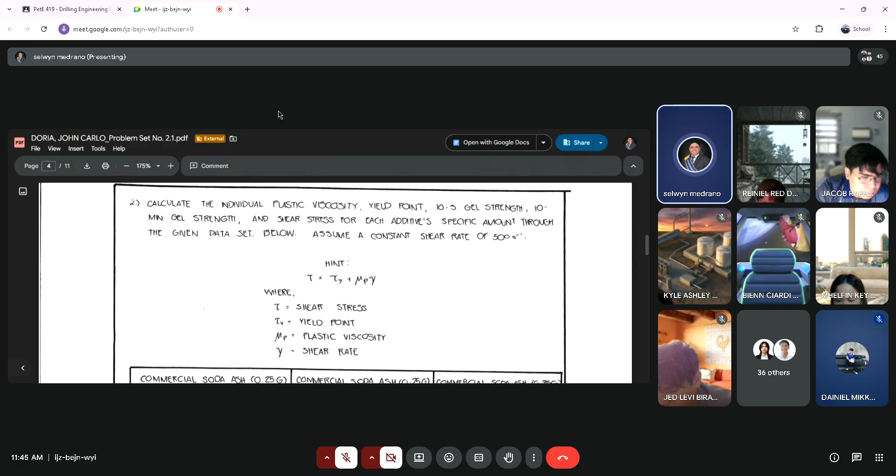So for this one, we have a given formula. Shear stress is denoted by tau, yung tau na symbol. If you could remember during our discussion in bit, we've also used tau. So we have tau sub y for the yield point. We also have mu p for the plastic viscosity. And we also have the gamma symbol for the shear rate. So the shear stress is equal to the yield point plus the plastic viscosity multiplied by the shear rate. Okay, so take note of this.

So we have this given data for commercial soda ash for 0.25, 0.5, and 0.75 grams. As you can see, there are 3 trials for the dial reading. So meron tayong 3 trials. So our goal is to get its average. So for example, for the rotary speed of 600 RPM, we have 3 dial readings, 18, 19, and 17. So we'll get its average in order for us to get the true dial reading.

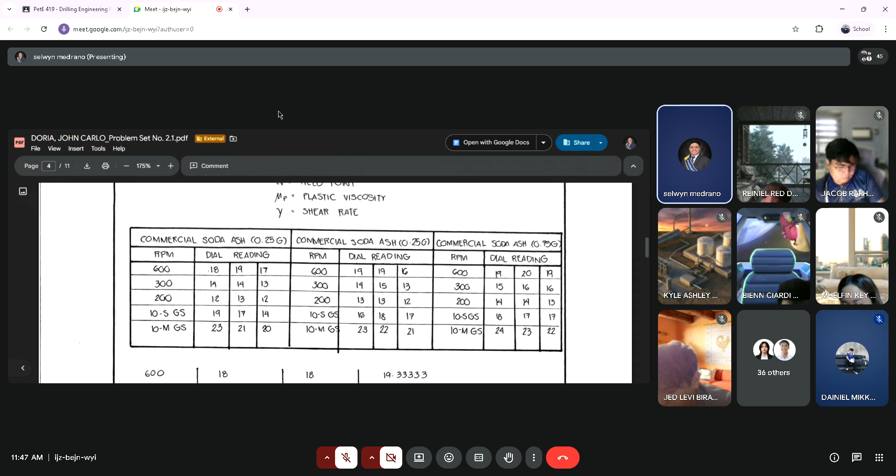So bakit mahalaga itong mga rotary speed na ito? Based on these rotary speeds, specifically 600 RPM and 300 RPM, we will be getting the values of plastic viscosity and yield point. So for our equation here, we have the formula for getting the plastic viscosity. The reading on 600 RPM minus the reading on 300 RPM will give us the plastic viscosity. Okay, gets po yun.

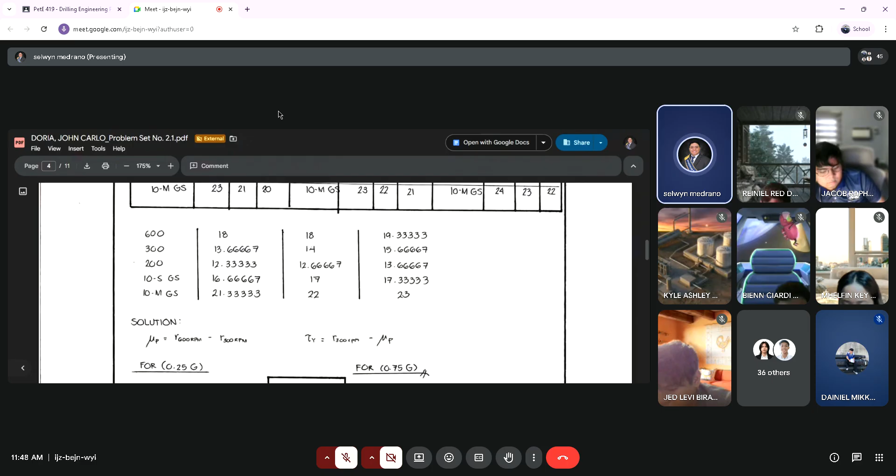Okay. I'll try to download this one para masulatan natin siya, for a while lang. Then I'll be opening it in Adobe. Okay po. For a while lang, while I reshare my screen. Can you inform me if visible na po siya? Visible na po. Okay, thank you.

So, our formula, ulitin ko, for the plastic viscosity, we have the reading in 600 RPM minus reading in 300 RPM. Then for the yield point, we have the reading in 300 RPM minus the plastic viscosity. So, based on the first equation, we can derive another formula for getting the yield point without needing to compute directly the plastic viscosity. So how will we do that? We know that the plastic viscosity is reading in 600 minus reading in 300. So this minus would be distributed. Magiging minus R600 siya, tapos ito ay magiging plus. So technically, our new equation is 2 times reading on 300 minus reading on 600.

Gets nyo kung bakit naging ganito yung bagong formula? Pwede natin siyang isulat as ganito. If halimbawa ang required lang hanapin is the yield point, we'll only be dealing with this formula here. Okay? Clear po tayo doon? Pinalitan ko lang po itong plastic viscosity in terms of the dial readings for 600 RPM and 300 RPM.

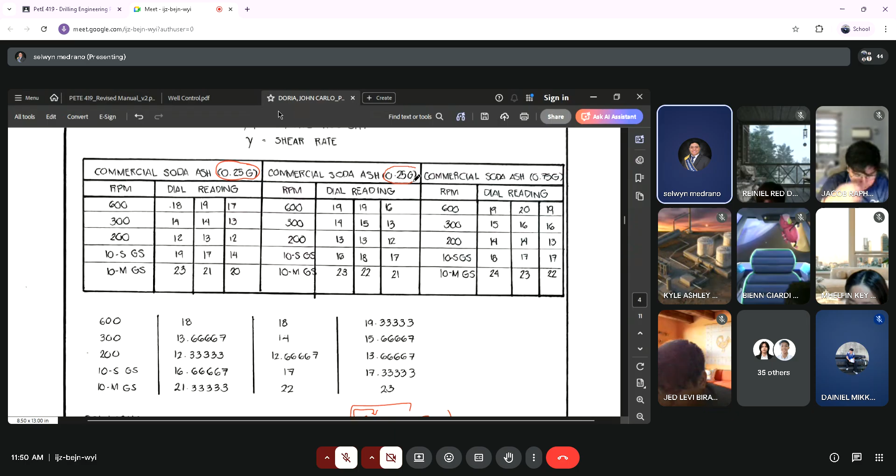So, as you can see here, there is a table that shows the average of each concentration of soda ash per rotary speed. For the rotary speed, it is subdivided into 3. Then we have here the 10-second and the 10-minute gel strength. So, just from its name, 10 seconds and 10 minutes. So technically, after we subject our drilling fluid samples to rotation at maximum speed, or 600 RPM, once we stop the viscometer, maghihintay tayo ng 10 seconds.

After 10 seconds, whatever the reading becomes, that's what we write as part of the data. That's our 10-second gel strength. So at first trial, after the viscometer rests, 10 seconds after, the reading is 19. That's for the gel strength.

We still need to find its average. Same goes for the 10 minutes - 10 minutes after the rotation of the viscometer stops. That's the concept on how we get this data or value.

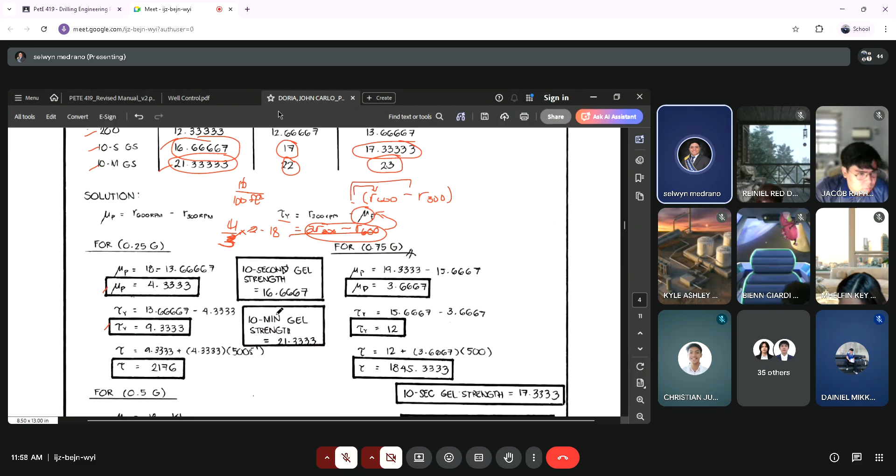So the answer we get is 2,176 and its unit is the same, pound per feet square or pound per 100 feet square.

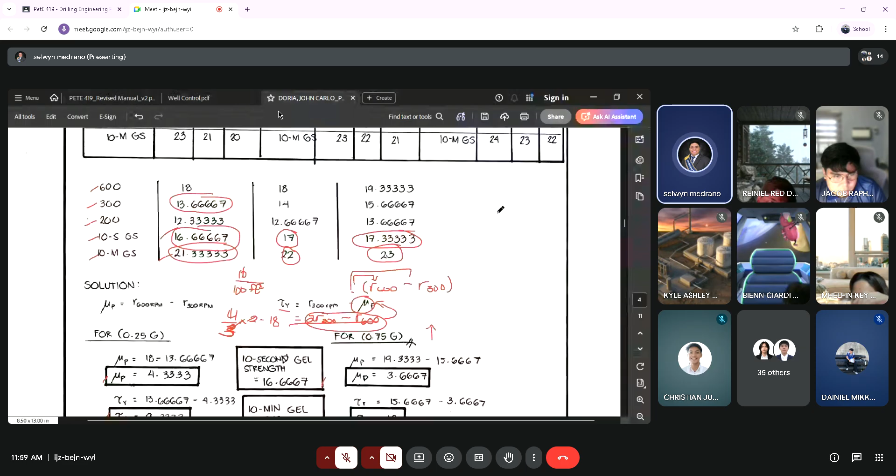As you can notice, the answers are almost the same. If you examine the values, there is a slight variation. As the concentration of soda ash increases, what do you notice? The plastic viscosity decreases as the concentration of soda ash - sodium carbonate - increases. And in terms of the yield point, it increases - there's an increasing trend. In terms of our shear stress, it's also a descending trend, decreasing as we increase the concentration of soda ash. So this is the effect of putting soda ash into our drilling fluids.

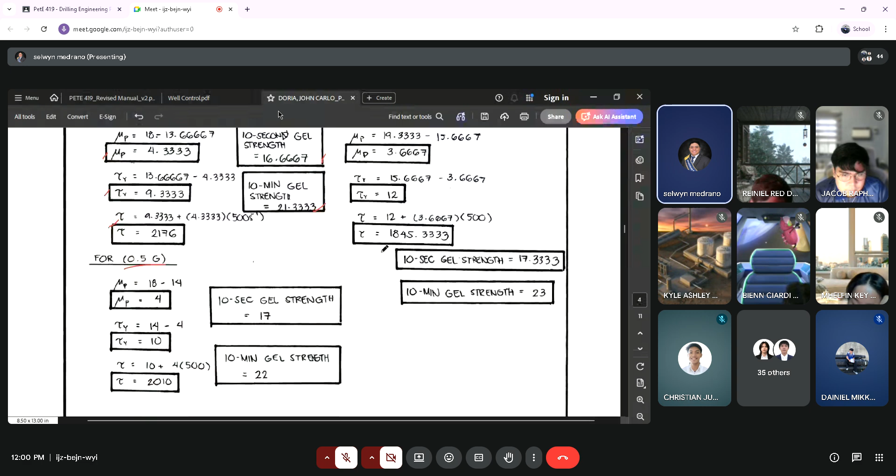Question? How about the gel strength? For the gel strength, as you can notice, there's a slight change - an increasing trend. So as we increase the concentration, the gel strength also increases, as you can notice in the data.

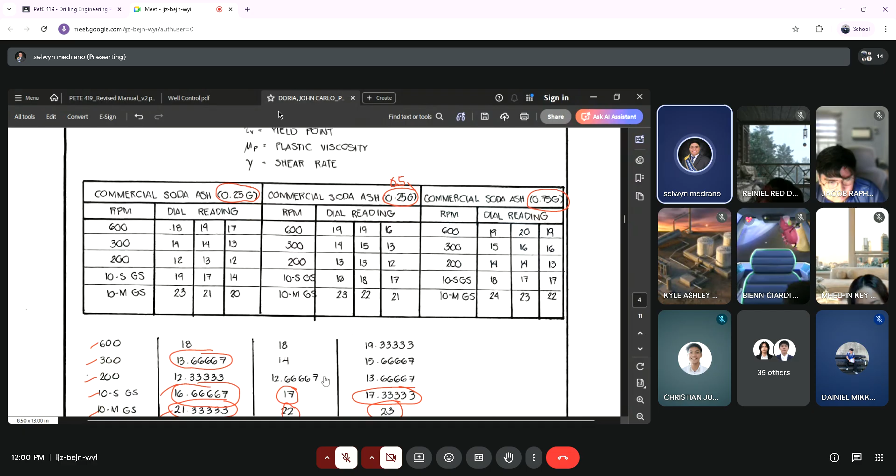Okay, thank you. So let me just reshare my screen for our next one. Same lang pa. Dito pala siya. Sabay na po siya on your end. Okay, close natin, close na natin to.

So for now we'll be dealing with well control. This is nasa lecture notes naman natin siya, but it is somehow in the middle, since the earlier part is more of calculation. Later on we'll be dealing with the calculation if time permits and if we still have time.

Okay, so for well control, we know that our borehole or our formation, the pressure is everywhere. The presence of pressure is inevitable. It's literally just there. So without it, we are outside space and time. So basically that's pertaining to pressure in general. Kung walang pressure, we cannot breathe because it will require pressure, the atmospheric pressure, for us to be able to breathe. So basically it's like the vessel or bloodline of our field.

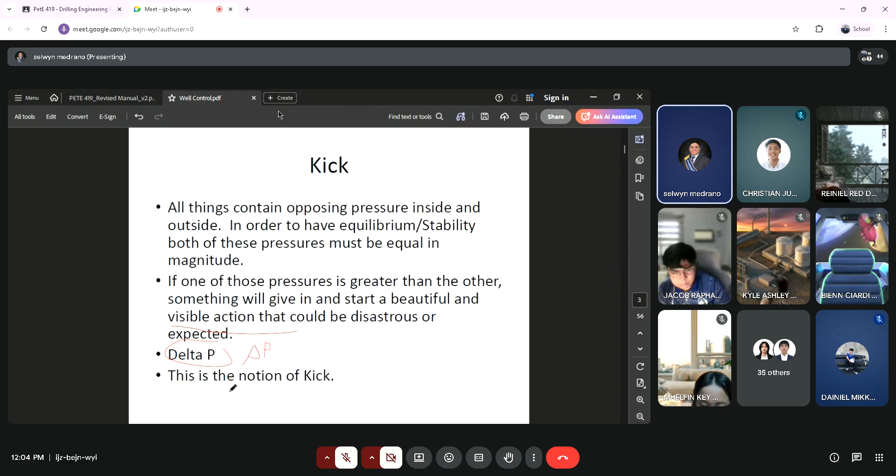So all things contain opposing pressure inside and outside. In order for us to have equilibrium and stability, both of these pressures must be equal in magnitude. That means if one is higher than normal, it is usually the formation pressure. If it's higher compared to the pressure exerted by our mud or the hydrostatic pressure, then technically there could be a movement, a kick. So that could be disastrous if it is not controlled. So kick is denoted as delta P because there is a difference in pressure, and this would be the notion of kick, the delta P.

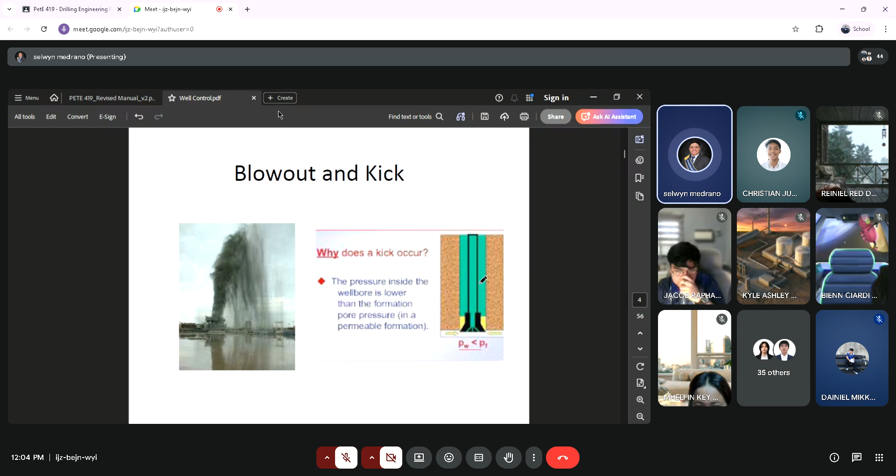Okay, so why does a kick occur? The pressure inside the wellbore is lower than the formation pore pressure. So this is just the mathematical equation or mathematical inequality that represents a kick - when the borehole pressure or the wellbore pressure is less than the formation pressure.

So well control and blowout prevention - without well control and blowout prevention, there would be higher drilling costs. This is just very obvious, no? Sobrang obvious ng part na yan. There would be higher drilling costs when there occurs a problem.

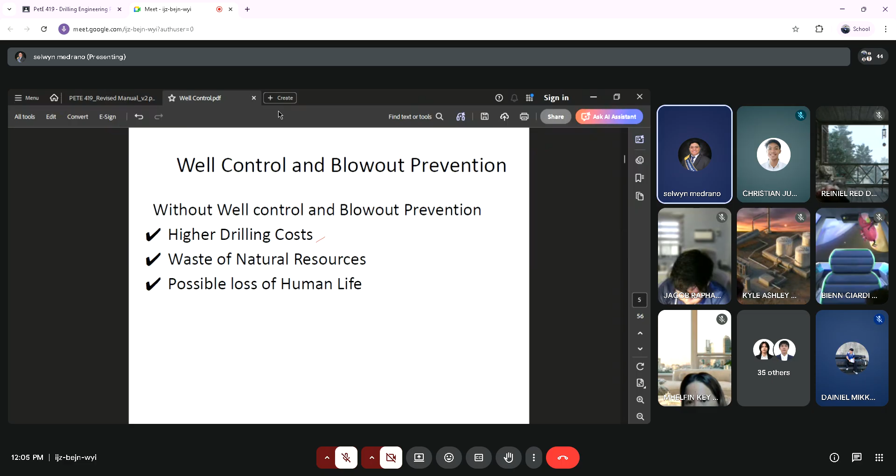So if a problem occurs, syempre magkakaroon ng several consequences with regards to devastation, that is connected with the second one - there would be waste in natural resources. And also it could result in a possible loss of human life.

So well control means the method used to minimize the potential of the well to flow or kick, and to maintain control of the well in the event of flow or kick. This well control is not only applied during the drilling operation - it is also applied during well completion, well workover, and even in abandonment, as well as in well servicing operations. So we have different measures, practices, procedures, and even equipment for us to ensure well control.

Such are fluid flow monitoring - we have real-time monitoring with regards to the fluid flow, with parameters related to such. We have pressure, the flow rate in terms of mass, in terms of volume. We also ensure safe and environmentally protective drilling. Siyempre, we have protocols that we are following. We also have proper procedure or proper execution of completion, of well completions, as well as abandonment and well workover.

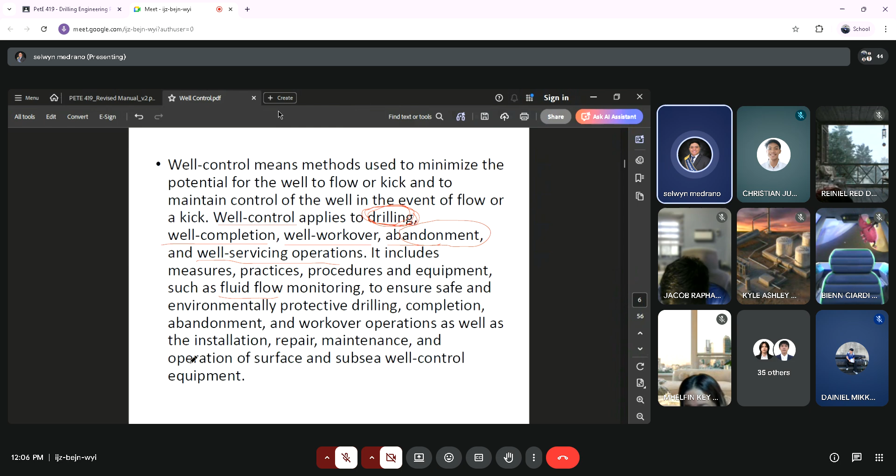So for well workover, that's where installation, repair, maintenance, and even the operation of surface and subsea well control equipment comes in.

Okay, so a formation fluid influx may result from one of the following reasons. We have here 6 listed reasons. First, we have abnormally high formation pressure.

So this is very obvious, no? Kapag mas mataas talaga yung formation pressure, syempre, in order for us to prevent kick, we need a higher density of drilling fluid or heavier drilling fluid or drilling mud.

Then also, one of the reasons is lost circulation. Kaya we need also to have the hydrostatic pressure exerted by our mud to be slightly higher. Kasi kapag sobrang taas, magkakaroon siya ng lost circulation. And this lost circulation, as time passes by, ang tendency, bumababa na yung ine-exert na pressure or hydrostatic pressure doon sa ating borehole, meaning it will again initiate a kick or the influx of these formation fluids.

Then also we have mud weight is very low or too low. Technically, by the formula of hydrostatic pressure, it's density times gravity times the height, or since this is talking about the borehole, this height is pertaining to the depth. So in order for us to get the high value of that pressure, we need to raise the density, kasi ito naman gravity, it's constant.

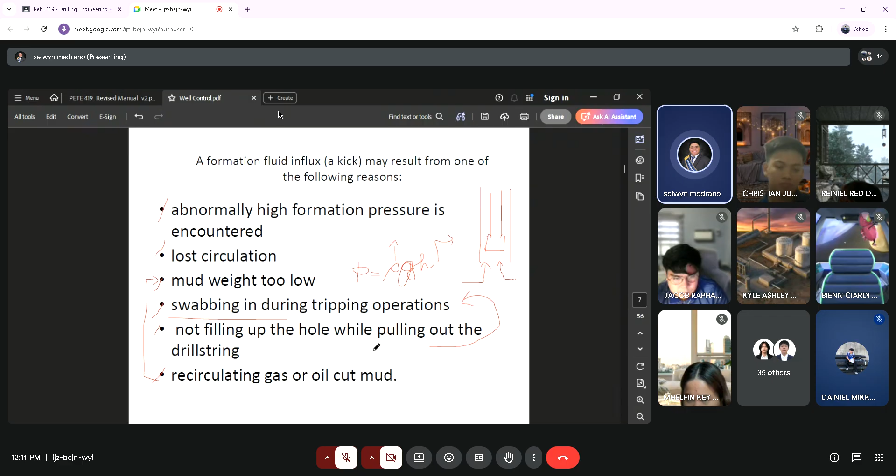So along with well control, we have this primary and secondary control. For the primary control, syempre yun yung pertaining to the drilling fluid's hydrostatic pressure. So that's the primary control. Secondary control naman is our BOP or the blowout preventer. They're familiar naman with BOP, kahit second year pa lang naririnig na ang BOP.

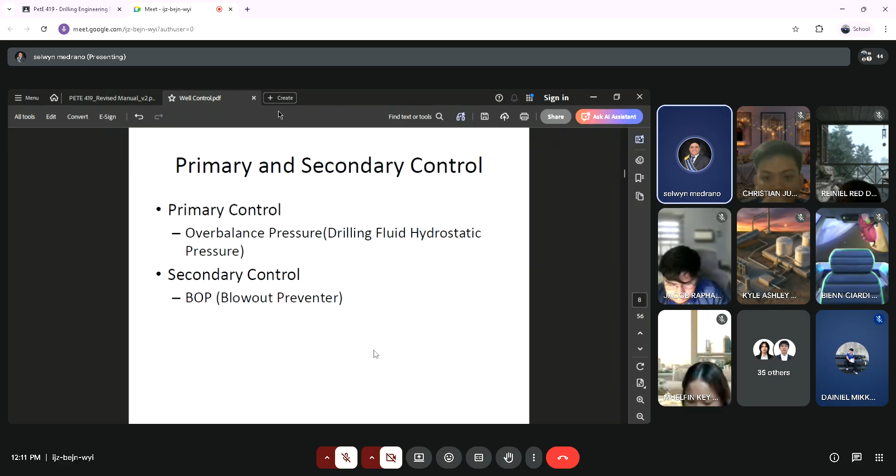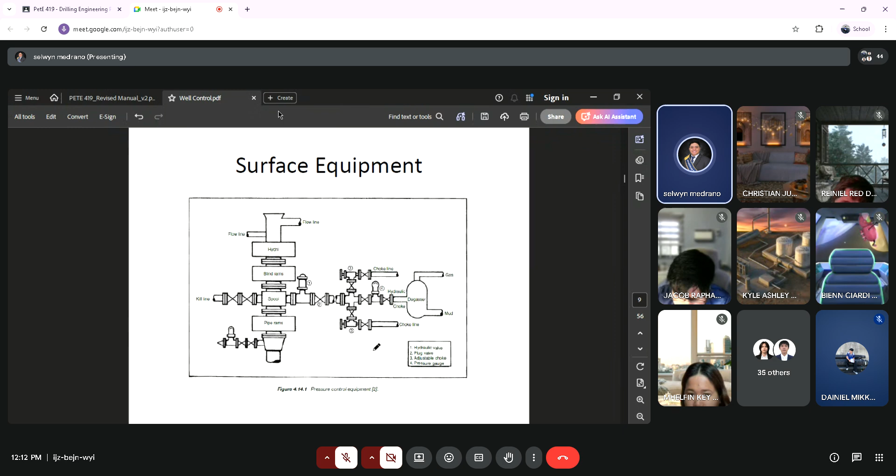Okay, so we have warning signs of a kick. Ano ba yung mga warning signs ng kick natin? First, we have drilling break. Ano pag sabing drilling break? Familiar ka sa drilling break? Di ba parang na-discuss na natin yan? Drilling break is the sudden increase in the drilling rate.

Tama? Are you familiar with drilling break, guys? Nagkaroon ng sobrang increase, or anong term yun? High increase, high difference in that small span of time, nagkaroon ng high increase doon sa drilling rate. So yun yung tinatawag na drilling break.

Next, nagkaroon ng decrease in pump pressure. Kapag nagkaroon ng decrease in pump pressure, meaning the fluids are already intruding doon sa ating borehole, kasi nababawasan yung pressure na in-exert ng pump, yung mga natutulak niya. Then we also have increase in pit level.

So this is a very common or very obvious sign or warning sign of a kick. Nagkakaroon ng increase doon sa pit level. Siyempre, doon tumataas yung level ng ating drilling mud. For example, yung level ng drilling mud natin ay halimbawa hanggang ito yung ating borehole. Bawa nandito pa yung drilling mud. Halimbawa nandito lang yung level ng drilling mud. Tapos napansin mo nagkaroon na increase. So tendency may kick, may possibility ng kick.

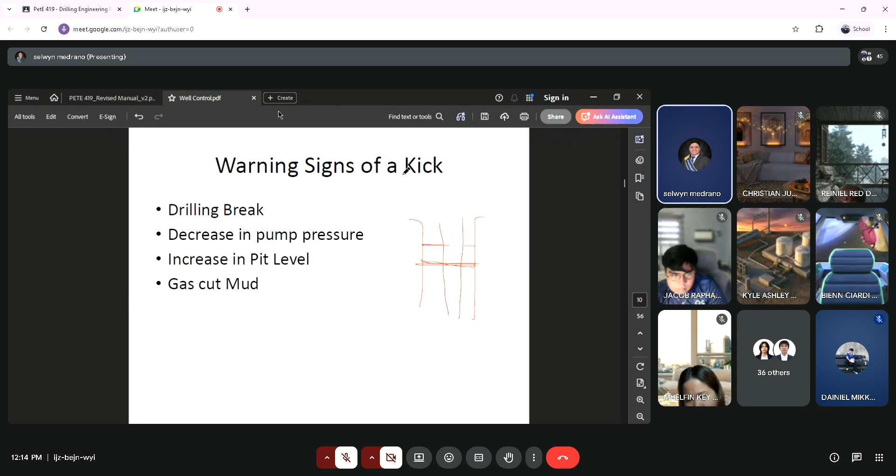Okay. By definition, may definition pala yan. Discuss ko isa-isa. So, yeah. Ang sudden increase of drilling break can be caused by, first, there is a soft formation, and it's also caused by permeable zones.

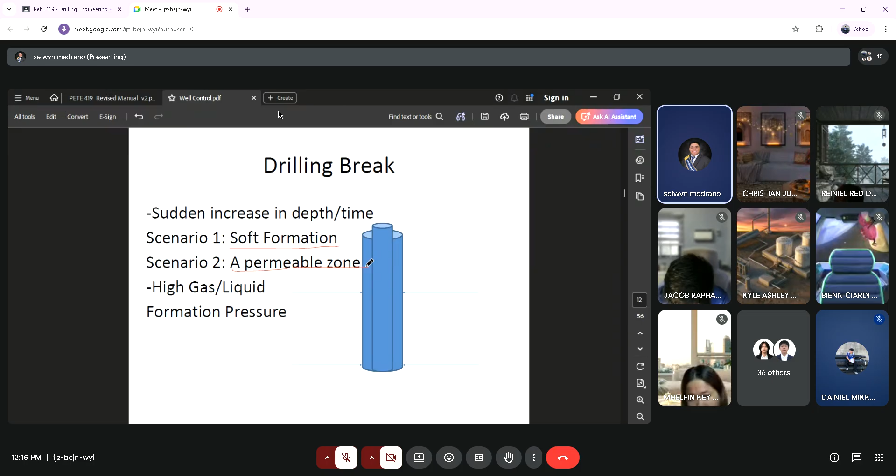So, decrease in pump pressure: when less dense formation fluid enters the borehole, yung hydrostatic head sa annulus ay nababawasan, which causes the pump pressure to also decrease. So, although reduction in pump pressure may be caused by several other factors, yung ating kinoconsider ay yung formation fluid influx. Yun yung main natin kinoconsider kasi preventive measure siya. Kasi yun yung kadalasang possible cause.

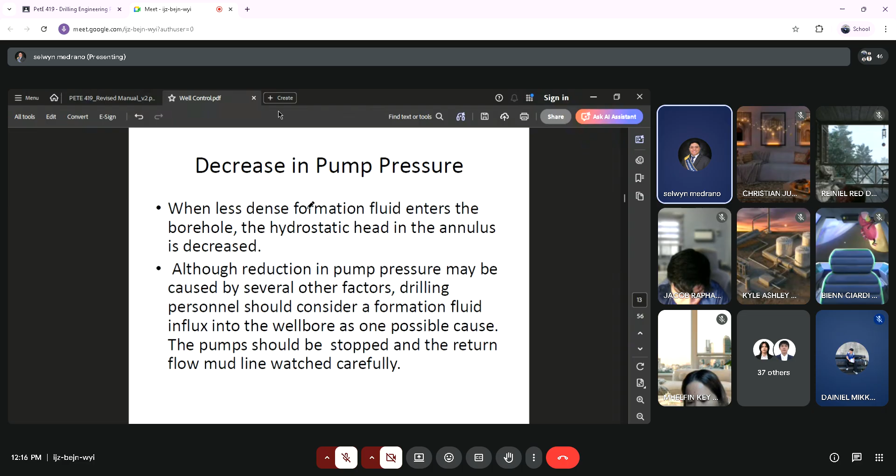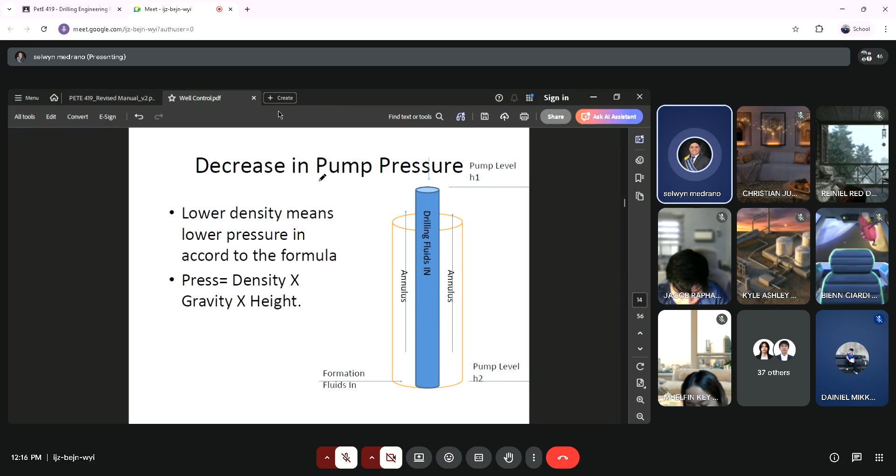And in order for us to remediate that situation, we must stop the pump and return the flow mud line. And you need to monitor it. So yan, ito yung isa pang regards to the pressure, ito yung pinakita ko sa inyo kanina. Lower density meaning low pressure in terms of the hydrostatic pressure. This is very common.

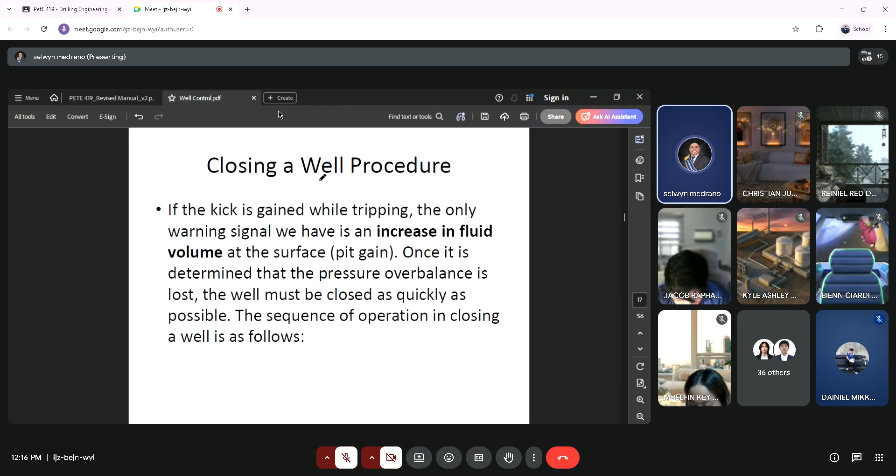So for closing a well we have this procedure. So if the kick is gained while tripping, the only warning signal we have is the increase in fluid volume. We cannot see the other warning signs. Yun lang yung nakikita natin kapag tayo nagti-trip. So para maiwasan, magpo-proceed tayo with kill procedure. So what do we mean by kill? We kill the well. Literal na i-shut off natin yung well. Titigil natin yung well.

So these are the steps on killing the well. So I won't be reading it. Yun naman po ay ibibigay ko sa inyo. So as you can see here, yung pinaka bizarre na step is itong number 8. We notify the company personnel. So basically this is not physical work but more of a communication part.

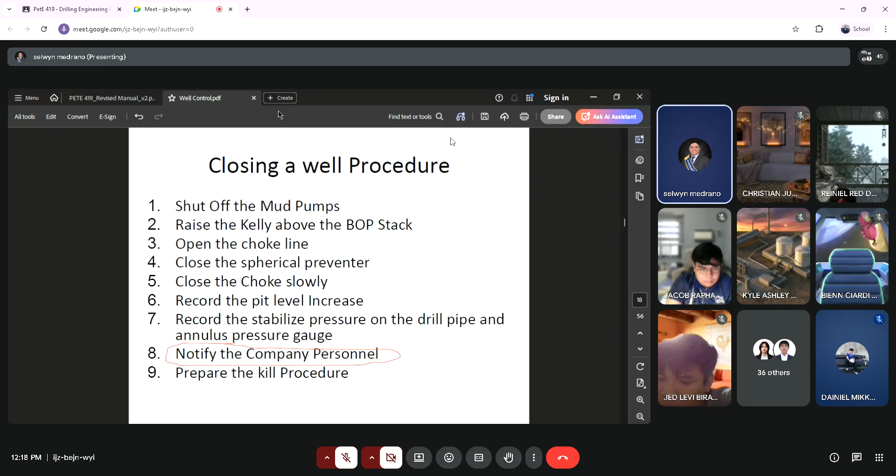Kailangan nating ma-communicate siya sa personnel ng company before mag-proceed sa kill procedure kasi if we kill the well, syempre tumitigil din yung operation which will cost us time. Kaya kailangan nating i-notify muna yung company personnel before we proceed to killing the well. Okay? Clear po yun? So if the well kicks while tripping, these are the steps that are necessary for us to conduct, so nine yan.

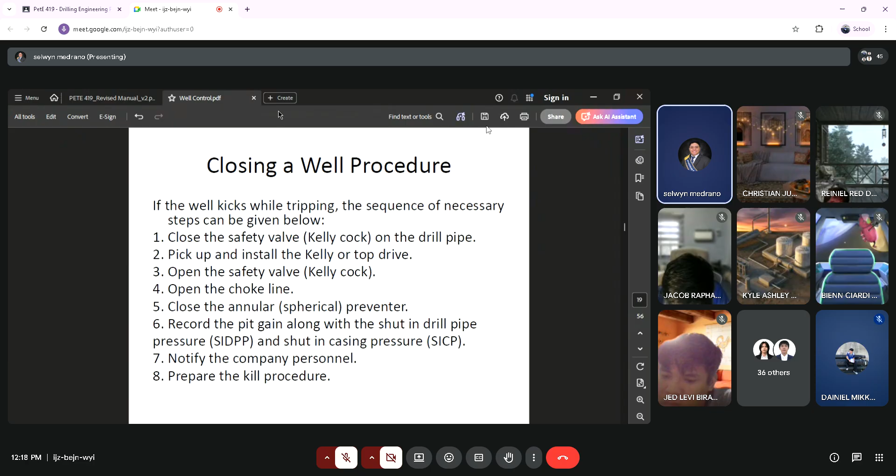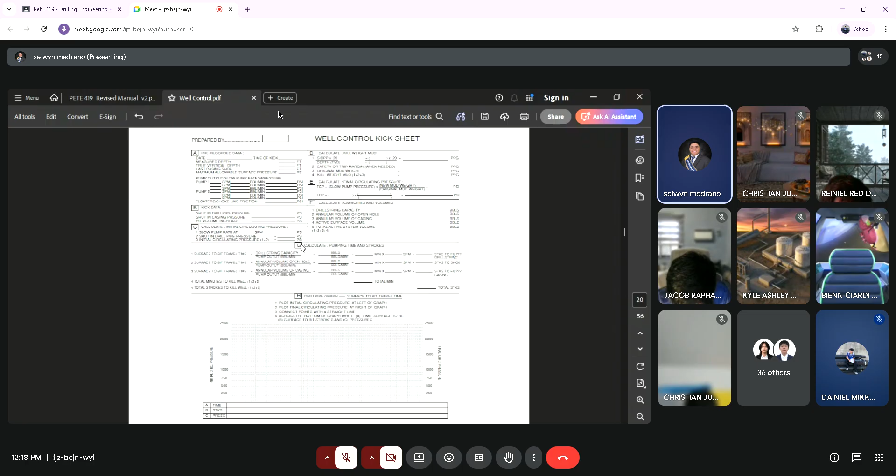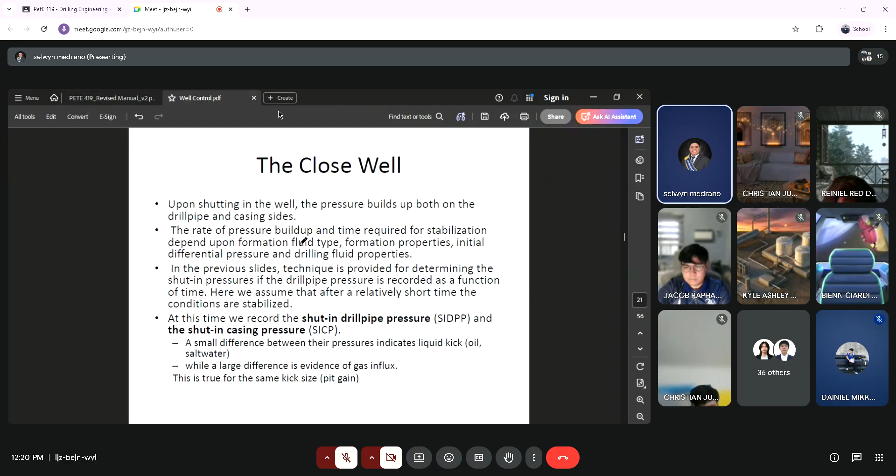So at this time, we record the SIDPP or the shut-in drill pipe pressure and the SICP or the shut-in casing pressure. If there is a small difference between their pressures, it indicates na meron daw pong liquid kick: oil, salt water, or even water. Pero kapag mayroong large difference between the two, ang kick daw po is most probably gas in nature. Okay, inulit lang din yan.

Okay, so for kill control procedure, we have three methods. We have the driller's method, the engineer's method, and the volumetric method. Driller's method is also called the two circulation method. Then engineer's method is one circulation. So yung main difference between the two, the driller's method is more the conventional or traditional way. Itong engineer's method will require computational analysis when it comes to how we circulate, so isang circulation lang yung kailangan, unlike doon sa driller's method, dalawang circulation yung kailangan.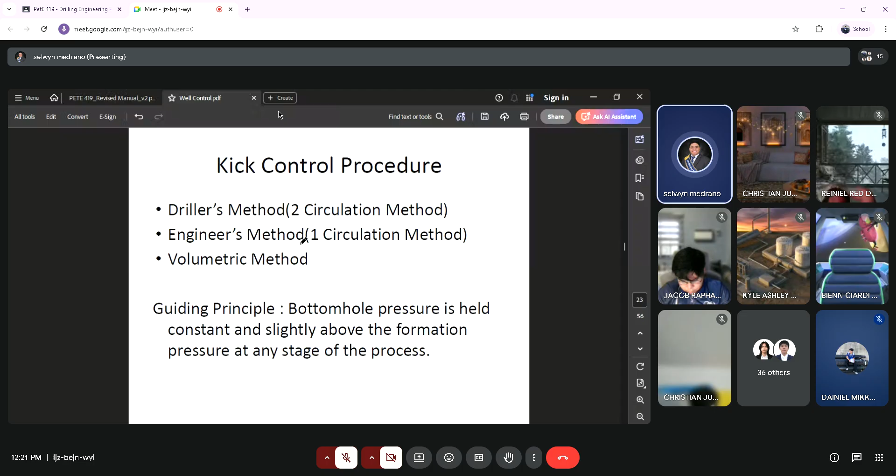So yung guiding principle for a kick control procedure is that yung ating bottom hole pressure is kailangan constant siya, and at the same time dapat siya is slightly above the formation pressure at any stage of the process. And in order for us to choose the most suitable technique, we need to consider these circumstances. So first, we need to consider the complexity of the method and also yung experience ng drilling crew.

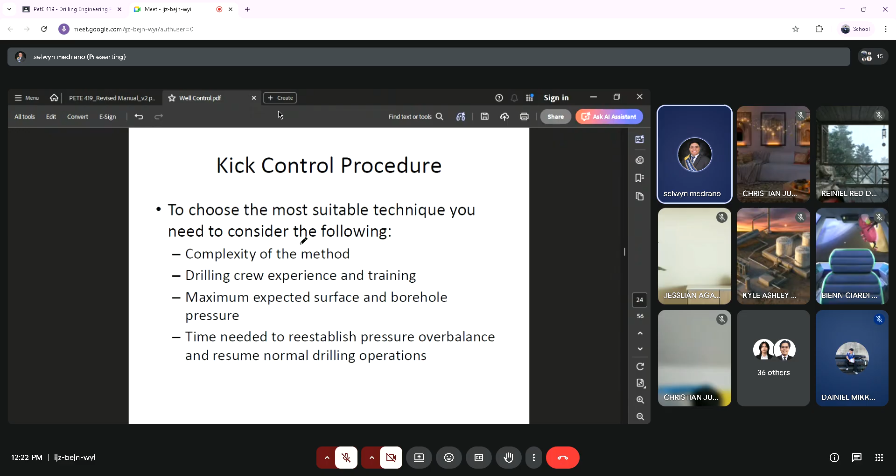For example, nagkaroon ng kick, yung mga drilling crew is more experienced or mas sanay sila sa driller's method. Technically, driller's method would be better, parang yun na yung practical na gawin for that particular situation. So also we need to consider the maximum expected surface and borehole pressure and also the time needed to reestablish the pressure overbalance.

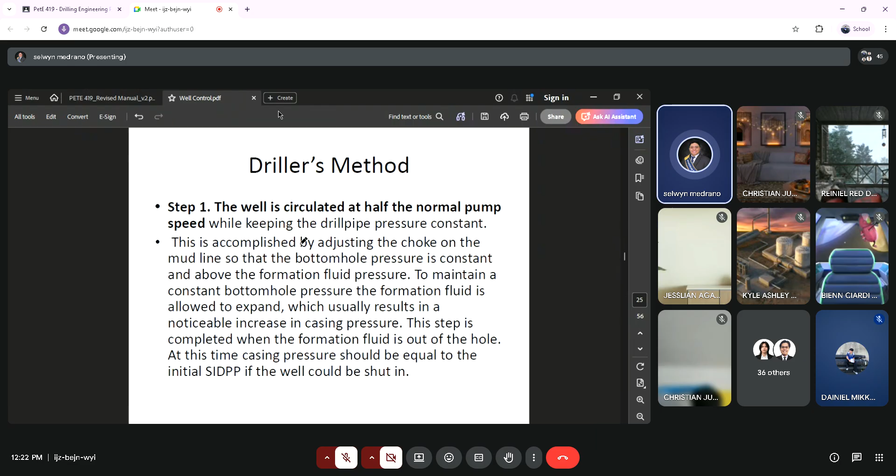So these are the steps for driller's method. I won't be putting into details na dito, but I have already differentiated the driller's and the engineer's method. So here, based on this graph, on the first step, as you can see, there is a constant SIDPP or the shut-in drill pipe pressure. Then by time C, before tayo mag-end doon sa step 2, dapat siya ay gradually nababawasan na yung SIDPP or the shut-in drill pipe pressure.

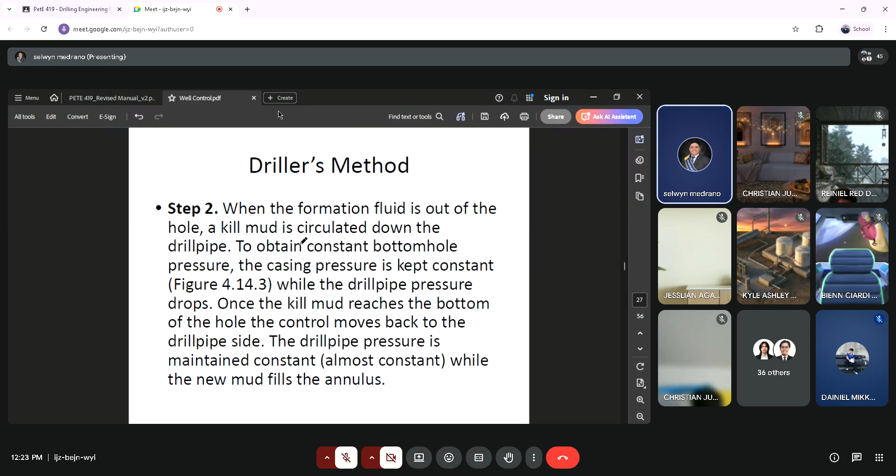So in terms naman of the shut-in casing pressure, we have this time denoted as t sub A, wherein yung shut-in casing pressure natin is at maximum. However, after that time, we need to decrease it to a point, specifically denoted by t sub B, wherein at a specific span of time, dapat siya ay constant. So this is basically after the step 1.

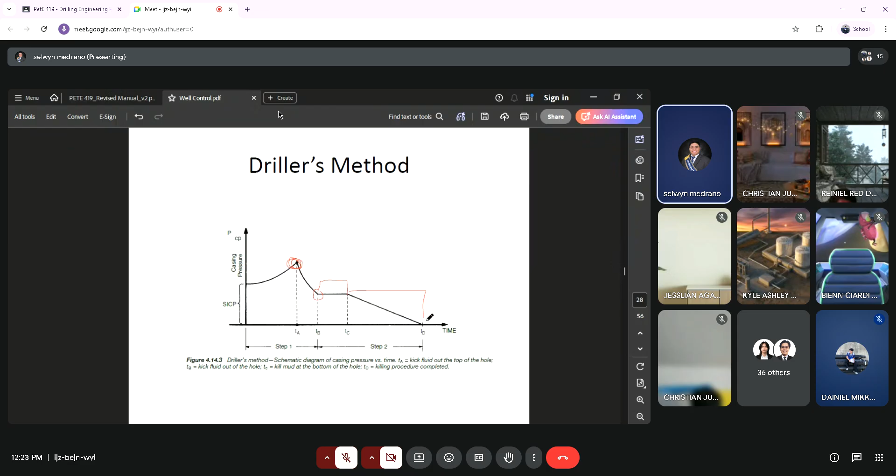Dapat ay constant yung ating shut-in casing pressure, and gradually, bago matapos yung operation or yung procedure, bumababa siya gradually. Hindi biglaan, but gradual. So, yan yung difference for the case of the shut-in drill pipe pressure and the shut-in casing pressure.

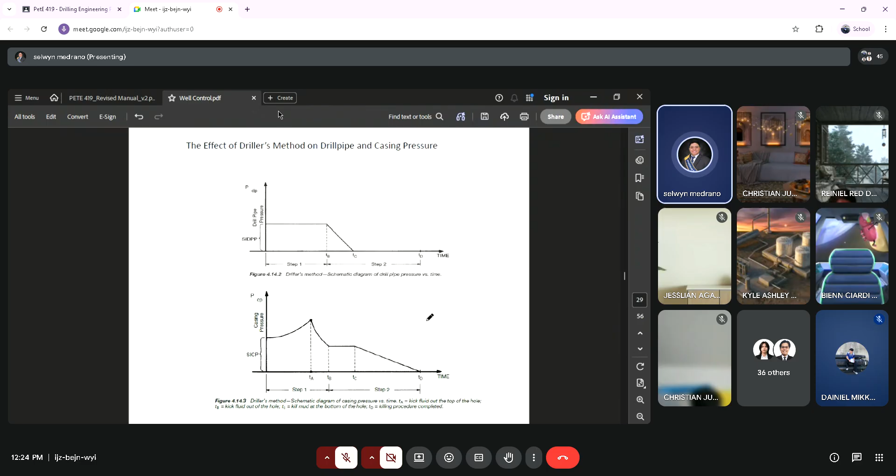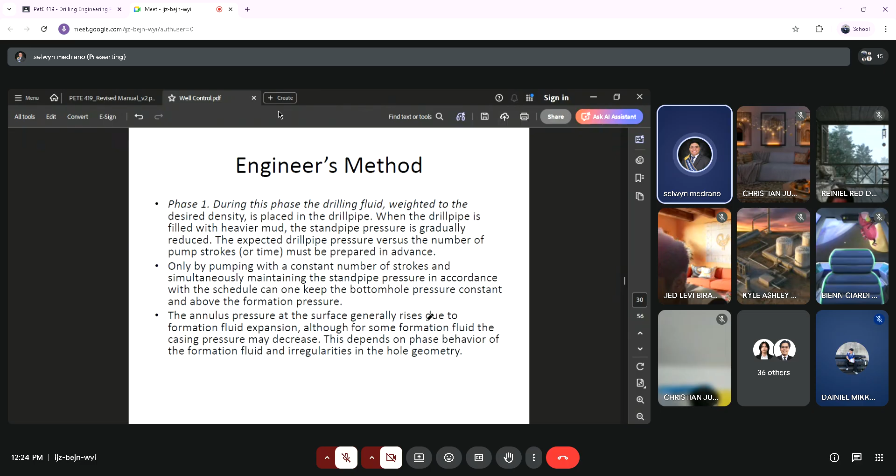In terms of the casing pressure, at the beginning of phase 3, dapat at maximum na yung casing pressure. Then, during phase 3, dapat drastic yung pag-decrease nung casing pressure up until bumaba na siya. So, yun yung nagiging situation in terms of the shut-in casing pressure and the shut-in drill pipe pressure during engineer's method.

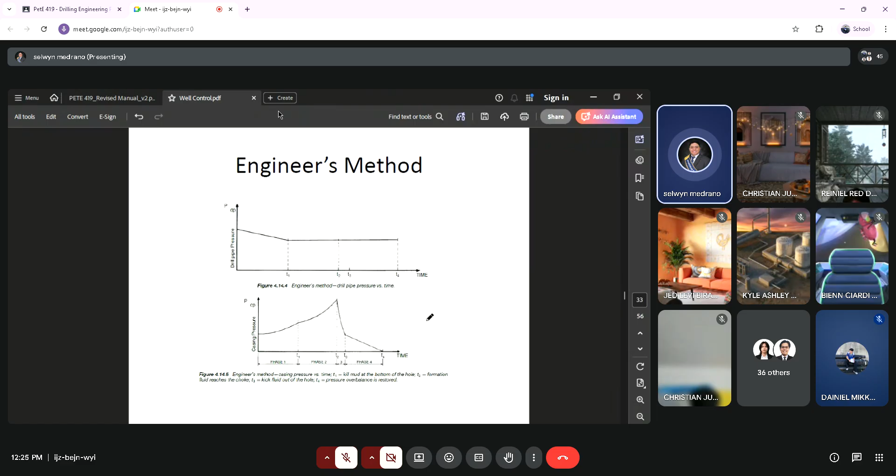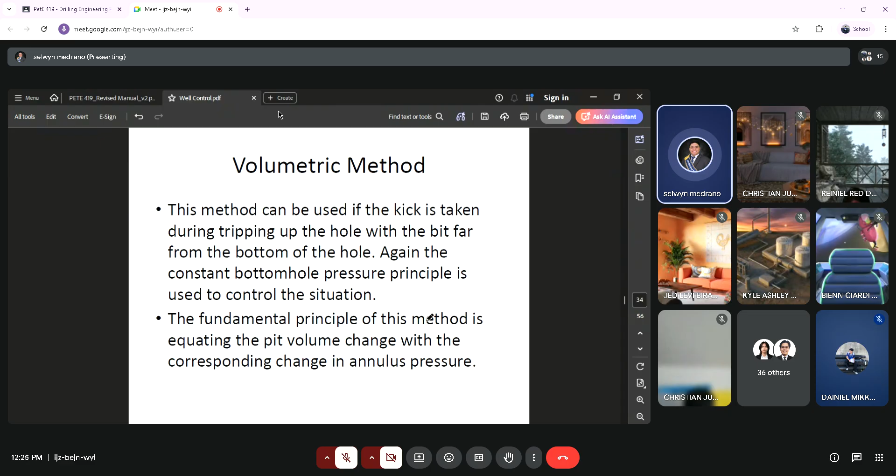Next, we also have the volumetric method. So this volumetric method can be used if yung ating kick is taken during tripping up the hole with a bit far from the bottom of the hole. So the fundamental principle behind this is you equate the pit volume change with the corresponding change in the annulus pressure. So this is the mathematical formula.

We have the change in surface pressure at casing side in PSI that is equal to the change in pit volume all over the volume capacity of the annulus, yung annular volume capacity, multiplied to the constant 0.052 times the specific weight of the mud.

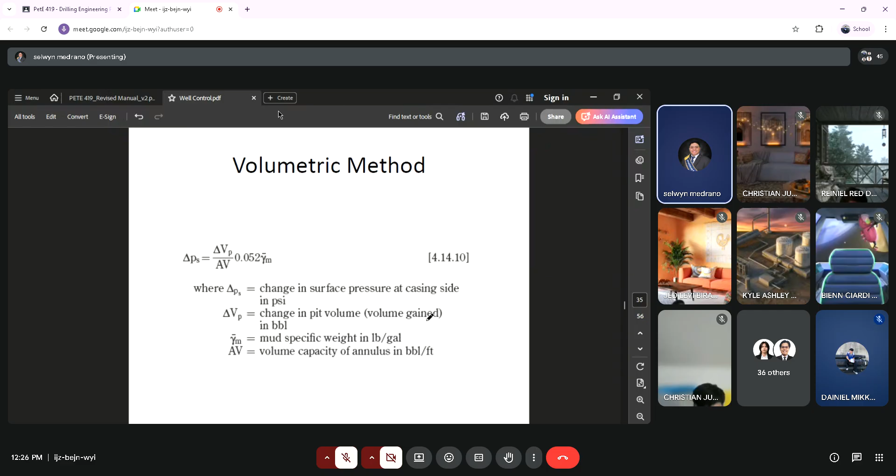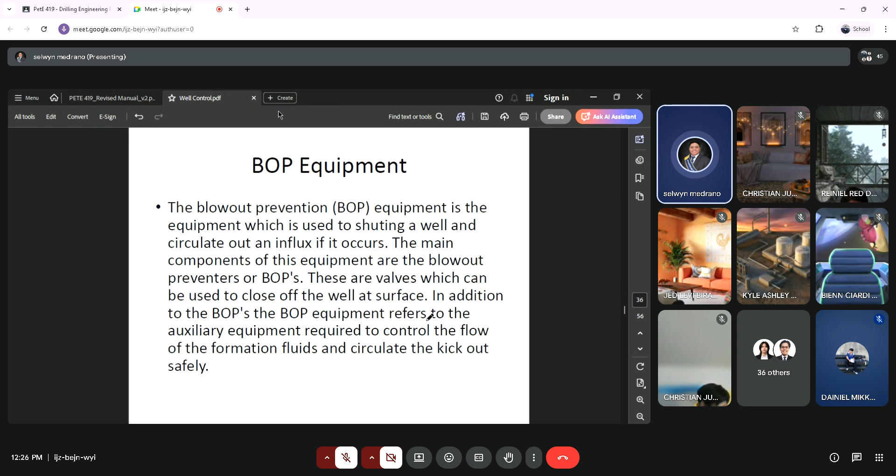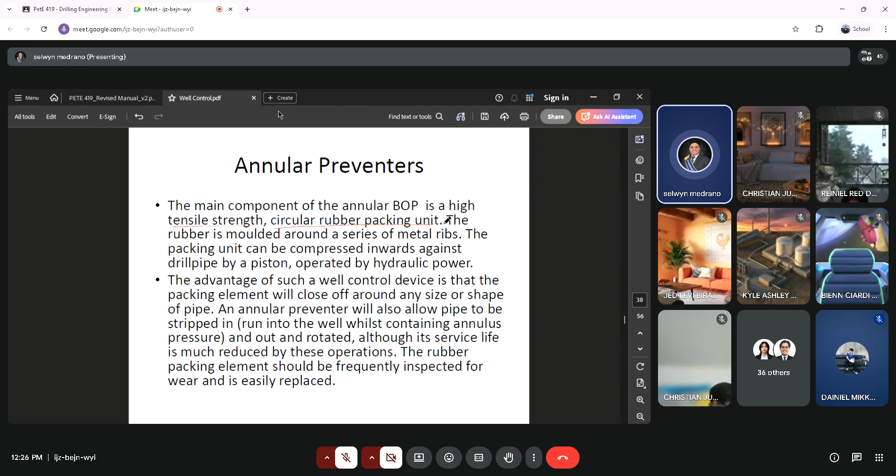Then we have the ram preventer. For the ram preventer, derived yung name niya from the twin ram elements. There are actually three types of ram available. We have the blind ram. Blind ram, ganun siya, literal na ganun. Tapos pipe ram, and also the shear ram. So blind ram will completely close off the wellbore when there is no pipe doon sa ating hole. Tapos yung pipe ram naman seals around a specific size of pipe. So meron siyang sizes na sinusunod.

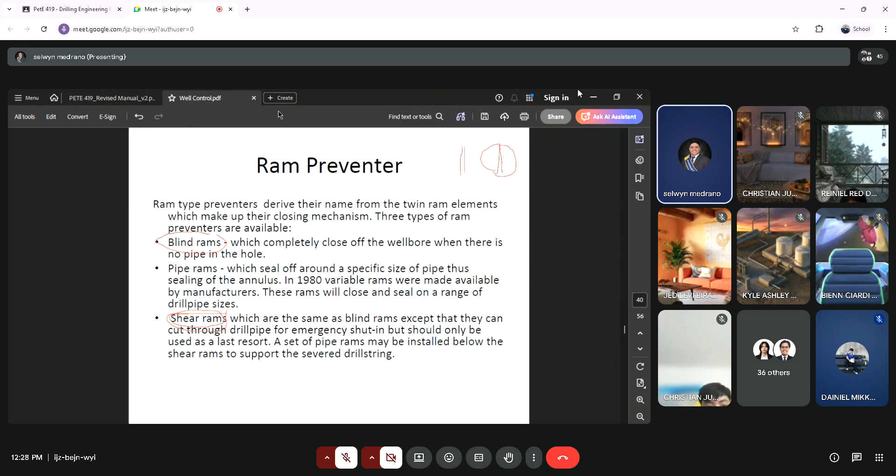We have a drilling spool, no? So drilling spool is a connector which allows choke and kill lines to be attached to the BOP stack. So these choke and kill lines, sila yung mga high pressure pipelines that are connected directly to the BOP papunta sa facility or sa production facility. And these are very vital kasi it reduces the pressure doon sa mismong BOP, no? Nakakatulong siya to bleed off. Nagkakaroon ng bleed off. Yung term bleed off.

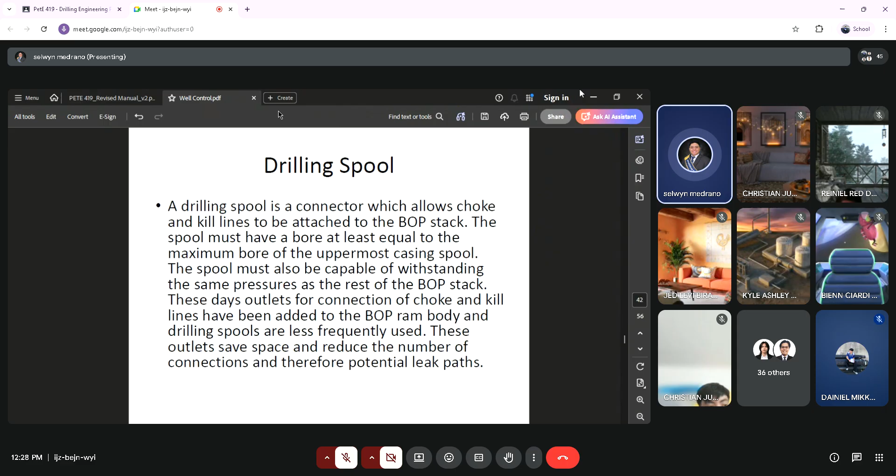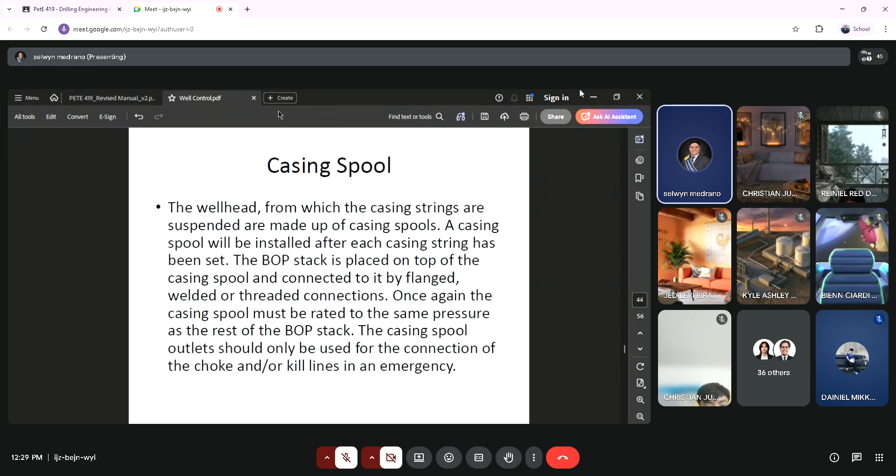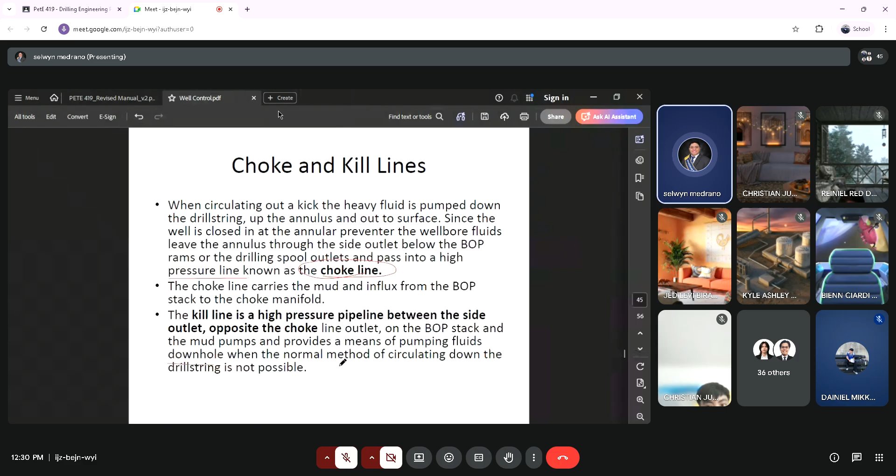We have a choke line and a kill line. So high pressure pipelines sila, and yung placing nila is very important, no? Kung saan siya naka-place. So since the well is closed in at the annular preventer, the wellbore fluids leave the annulus through the side outlet below the BOP. Then dumadaan siya sa high pressure line known as the choke line. Ito yung choke line. Then yung kill line is opposite to the choke line on the BOP stack and the mud pumps, and provides a means of pumping fluid downhole when the normal method of circulating down the drill string is not possible.

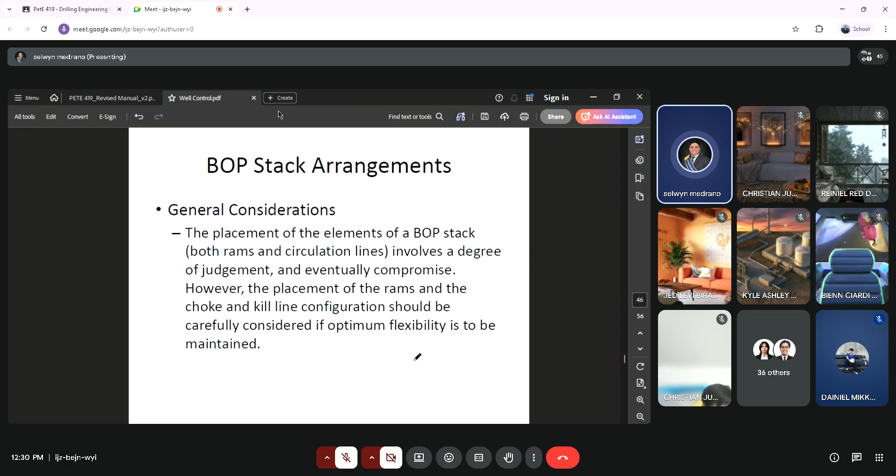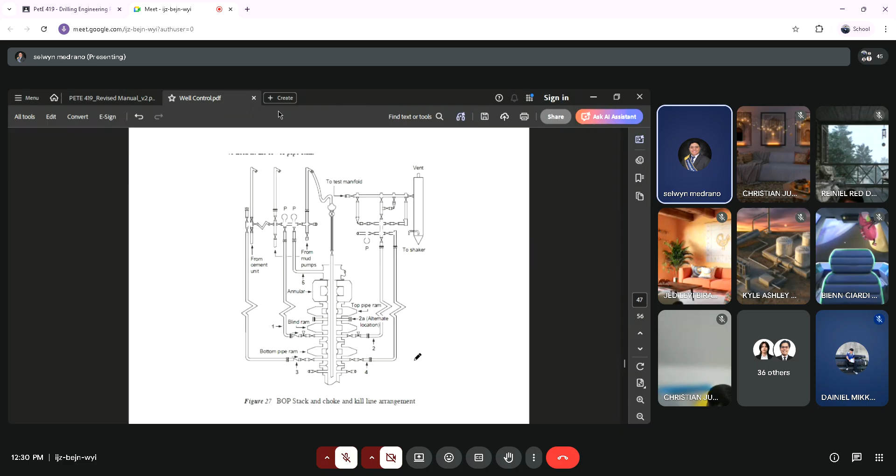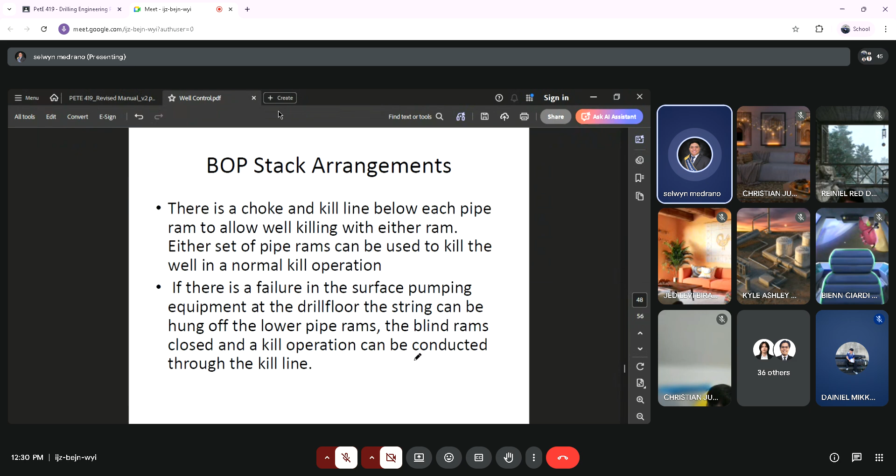So these are the general considerations in terms of the placements ng ating BOP stacks. Ito yung itsura ng isang BOP stack arrangement along with its kill line and choke line. So there is a choke and kill line below each pipe ram to allow well killing with either ram. So kahit anong type ng ram, mapa-blind, mapa-pipe, or mapa-shear ram, we can allow the kill operation. So we have the API recommended considerations based on API Recommended Practice 53, wherein there's a code used for the stack arrangements ng ating BOP stacks.

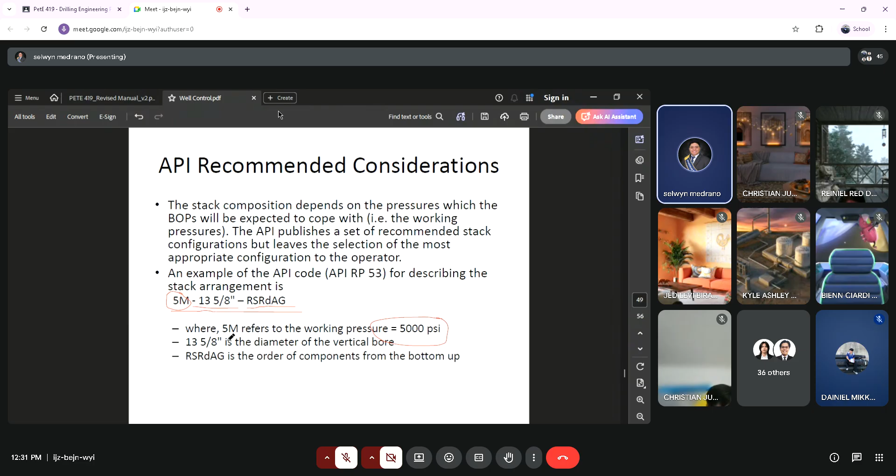So meron siyang code 5M. For example, we have this example 5M. Yung 5M naka-refer po siya sa working pressure. That 5M is pertaining to 5,000 PSI, 13 and 5/8 inches, pertaining to the diameter of the vertical bore. Then this RSRdAG is the order of the components from bottom to up. Same lang siya sa R, S, Rd, A, G. Baliktad lang dito. G is pertaining to the rotating BOP used for gas and air drilling. A is for the annular preventer. Rd means double ram. S is for drilling spool and R is for single ram.

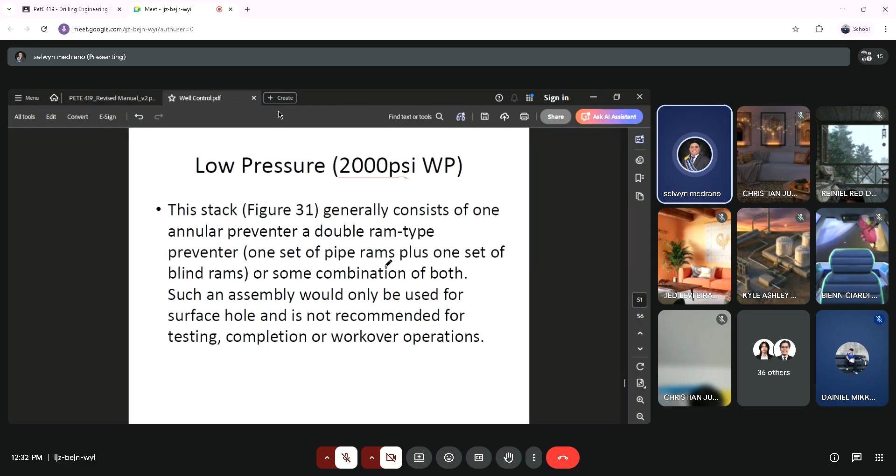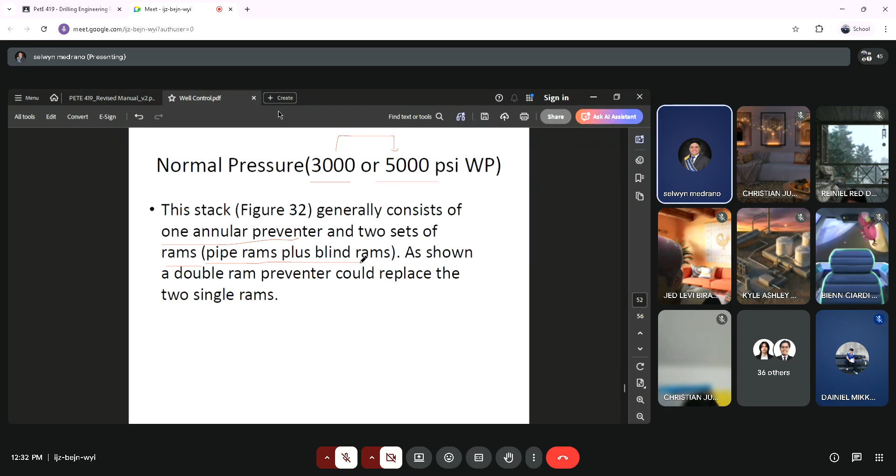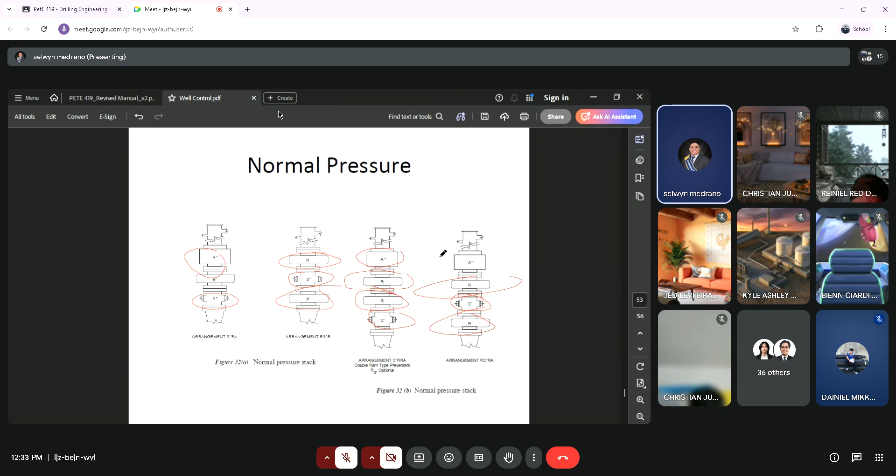So iba-iba yung itsura niya. So for low pressure, specifically 2,000 PSI, it generally consists of one annular preventer, a double ram type preventer, or some combination of both. Pag 3,000 to 5,000 yung normal pressure, consists naman of one annular preventer and two sets of ram. Yung common na ginagamit ay combination ng pipe ram at blind ram. So ito yung ginagamit for normal pressure. So may two sets of ram. Ito ay spool, itong S, drilling spool. Ito ang annular, yung annular preventer, yung nasa taas.

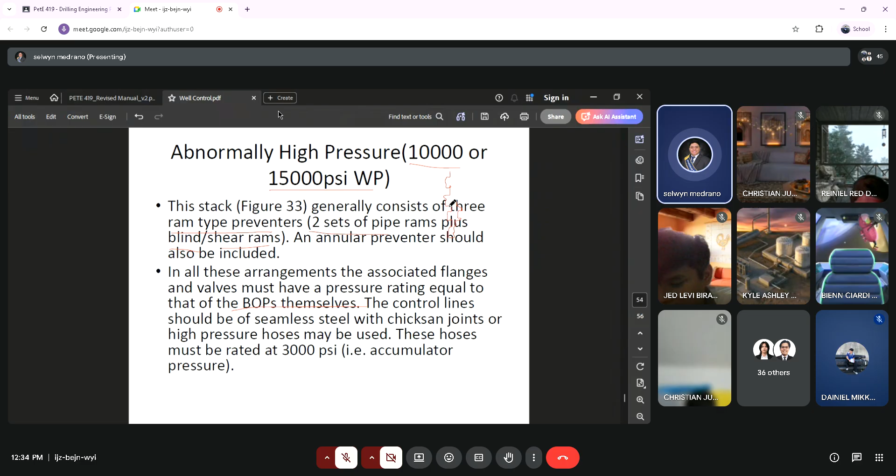So in all these arrangements, the associated flanges and valves must have a pressure rating equal to that of the BOPs themselves. Kasi ang tendency, kung magkakaiba siya ng pressure rating, kung yung isang part or section ng equipment ay iba ang rating, yun yung possible na maging weakest point doon sa arrangement. Doon possible magkaroon ng disruption, doon possible na masira. Kaya dapat pare-pareho yung pressure rating ng ating material na ginagamit. So yan yung sample ng arrangement for abnormally high pressure.